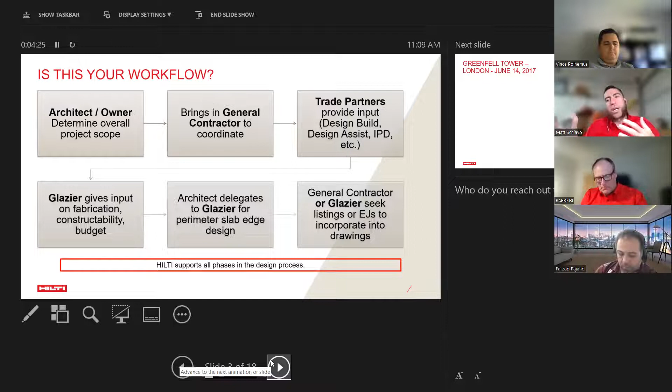Now, I work with Brian, and Brian and I talk in the Bay Area. A lot of times the architect will put that EJ on their drawings, but down here in my market in Orange County and San Diego and in Los Angeles County, I usually see the glazing shop drawings reflecting the engineering judgment. So just whoever's carrying the permit is the one that's responsible for those design elements.

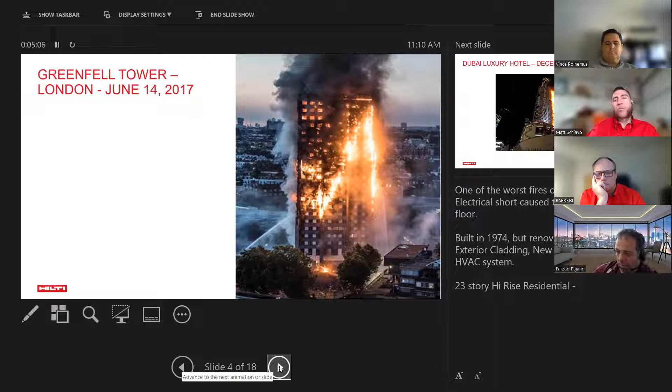And why is it important? Well, it's important because, as you've seen, you'll see these newsreels that come out, big stories on the news about fires, large scale catastrophe fires that happen. And one of them would be, say, Grenfell Tower. This is probably one of the bigger ones that happened in the past 30 years. It had polyiso insulation in the slab edge panels, and it was sort of like an NFPA 285 situation where you had flame within the panel itself, propagating like a sandwich panel situation. Definitely something that stresses the importance of selecting a proper Firestop system or a Firestop design that is code compliant.

Here's another one here for the Dubai Luxury Hotel from 2015. This is another large scale sort of leapfrog effect where you can see the flames basically leaping outside the building and taking out the glass panels one at a time. And that has a lot to do with fire science and fire dynamics. When the flame is looking for oxygen, after it's completely consumed everything in the interior, it basically reaches out into the exterior and starts to go to the next floor.

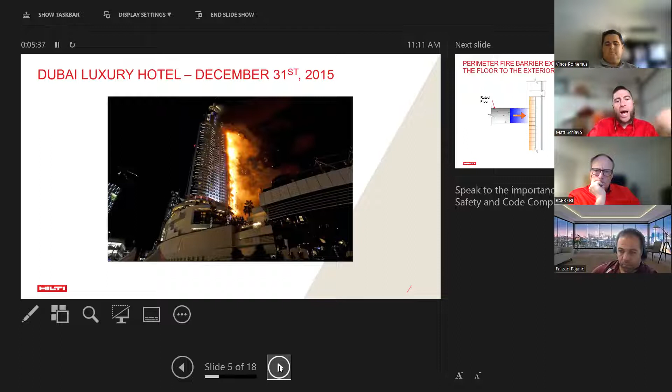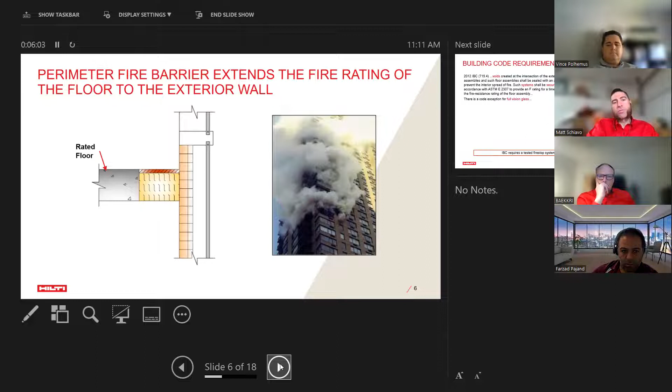The building code actually breaks this down in section 715. So not to nerd out on too much code stuff, but basically the code says that you have to fill that void with an approved system to prevent the interior passage of flame. A lot of architects tell me like, hey, what about the exterior? Well, you saw in that previous image that the flame is already exiting. It's already taking out the panels on the exterior anyway. And in that test, that ASTM 2307 test, that is the specific test standard for curtain wall systems.

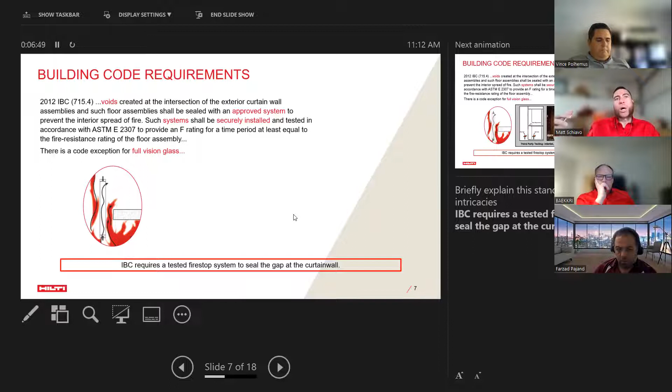But yes, the IBC requires that a Firestop system be applied at the gap of the curtain wall. And so what you get is, after you do a full-scale 2307 test, usually the manufacturer will achieve a listing. And that listing is now part of the UL directory or the Intertek directory.

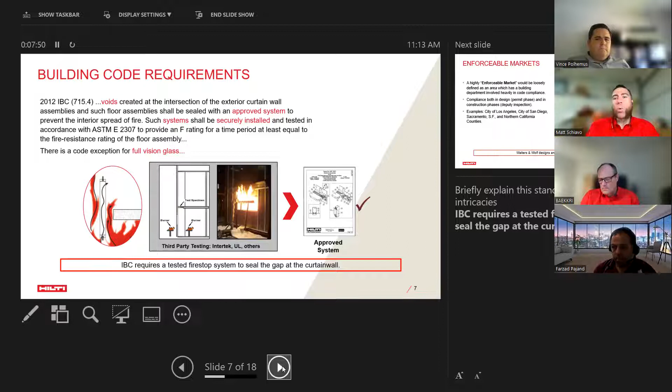It's basically a turnkey design detail that would otherwise not require an engineering judgment. And so why is this important to facade design or curtain wall design? It's because wherever you guys work, Walters and Wolf has offices in what we would consider enforceable markets. These are markets where not only do the code enforcement agencies enforce the code to the strict letter of the law, but they also have their own processes in place that actually kind of impact the workflow.

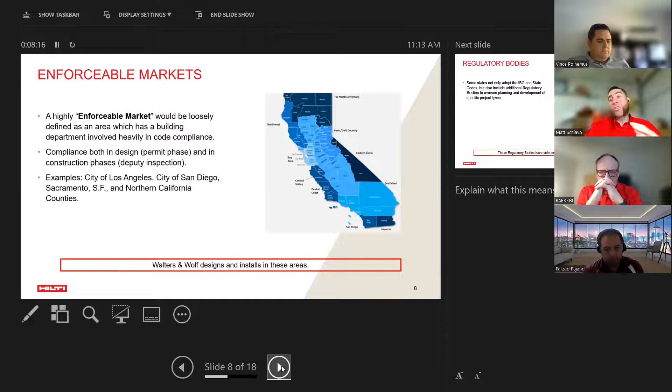So for example, you have regulatory bodies up and down California. In Brian's area and in my area, we have a lot of projects that fall within OSHPD's jurisdiction or HCAI's jurisdiction. If you're working with the California State Fire Marshal, you also might have the DGS or Division of the State Architect if it's a DSA project. And California State Fire Marshal, in some areas, they may not accept certain engineering judgments or engineering judgments at all. And so that really stresses the importance of finding a listed system or a turnkey system that doesn't otherwise require an engineering judgment.

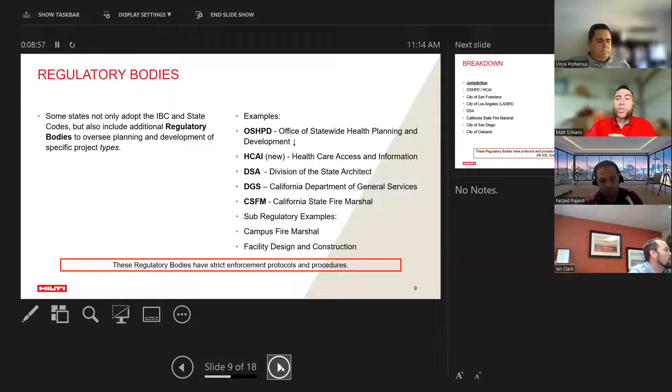So along with the code, which is that first step we talked about, then you have these enforcers that regulate the code. And then you have the regulatory bodies like plan checkers that require certain forms to actually go through plan check. So they actually want to see the code and then they want to enforce the code. But when it comes to the forms that they require, that usually is for fee, right? The plan checker or the city wants a fee for usually the glazer to file that and say, hey, this is our deferred permit, and here are the engineering judgments that go with that when you go into plan check.

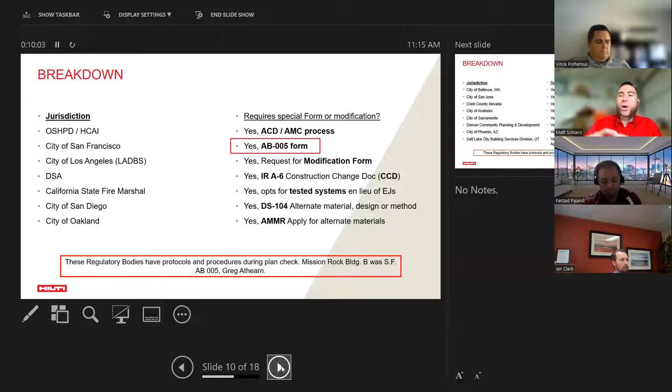So here on the left, it's just a list of city jurisdictions between, say, San Francisco, LA, California State Fire Marshal. And on the right of this slide, it shows the forms that are required. One of them I wanted to point out, going back to Mission Rock Building B, which is a precast project, is the AB-005 form. This is a form that I worked on with Greg Athearn on that project, alongside Hathaway Dinwiddie and Adamson Associates Architects. And really, we were able to manage that through plan check for Walters and Wolf. That was both for the glazing systems and for the precast systems.

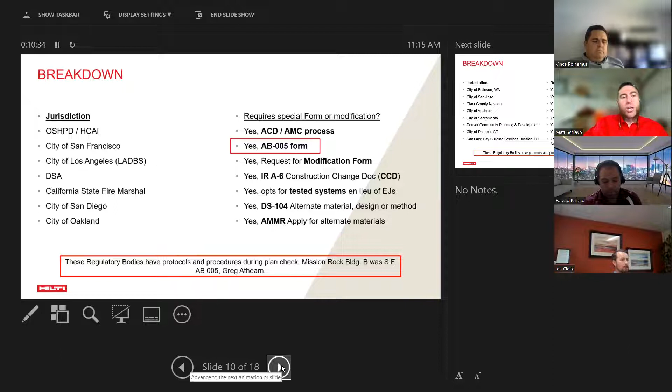So that kind of service actually helped clear the permit for fabrication and design to continue and for the approval to be satisfied with the jurisdiction. And I believe San Francisco Fire is actually approving that as we speak for that project. So this is just a good example of what to look for in other markets, like Washington, Nevada, Clark County, Arizona, Utah. These markets also require a form process when it comes to validating the shop drawings or validating the engineering judgments if there's a modification, because every time you have a listing, it's ready to go. And anytime you have a modification comes this process.

So you can see here on the right side, again, coalescing with the bullet points on the left, some that stand out. For example, Nevada, Clark County, they require a 1003 form, alternate means and materials form. Or in Bellevue, Washington, they require an AMM form. If you're working in Denver, they go with an AMMR form. And so this is really where we can come in to help you and to help assist Walters and Wolf in any market that you're working in. It gives us that agility to help you with the different offices that have different expertise. And we want to offer our expertise to help you through plan check with those individual offices that are shooting for plan check deadlines.

So this is kind of a summary of the services that we offer Walters and Wolf. And these services are offered to help you get through that plan check process. It could be only one service, or it could be a grouping of services. It really doesn't matter. Brian, Christian, and myself are dedicated to this service offering in whatever capacity on whichever project. So to start, we can help you with finding systems. Brian and I have put together submittals like this. This is just a consolidated one, but think of helping the Walters and Wolf engineers or designers quickly select systems so you can easily incorporate them into the drawings.

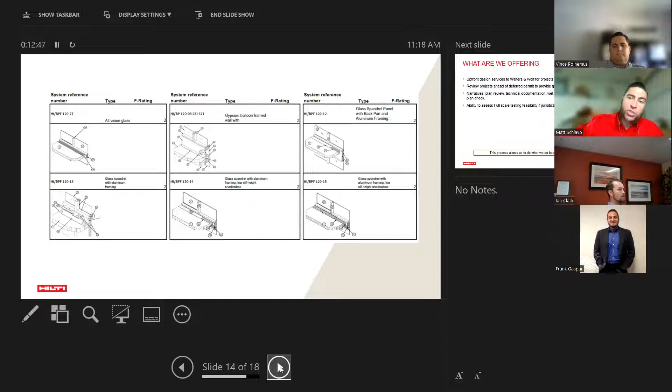You can see here, this is just kind of a schedule detail approach where you could keep this on your desktop, you could keep this on the Walters and Wolf server, and whenever you're dealing with perimeter fire containment, you could easily locate a system that matches the MAC clip or that matches your design, and click on that and just drop it right into the drawings. This would be more of the tested system approach.

We also provide technical submittals, like just the overall submittal. Maybe you have a project that's LEED. Maybe it needs some CDPH or green building type requirements that the architect needs to satisfy because the joint has Firestop materials in it. We can provide technical submittals.

Of course, we do engineering judgments. Brian and I do those on a daily basis. You would call us, send us your CAD drawing, and we would basically churn out a detail for you in CAD and send it back to you ready to go.

And then, of course, if you need additional service on top of those standard offerings, we offer wet stamp. So maybe you have a job where the jurisdiction wants to validate that the design is sound and they want a third-party approval. We can do that with a wet stamp. We use multiple engineering groups here in California and in other markets to provide wet stamps, in addition to our sign and seal on the EJ itself.

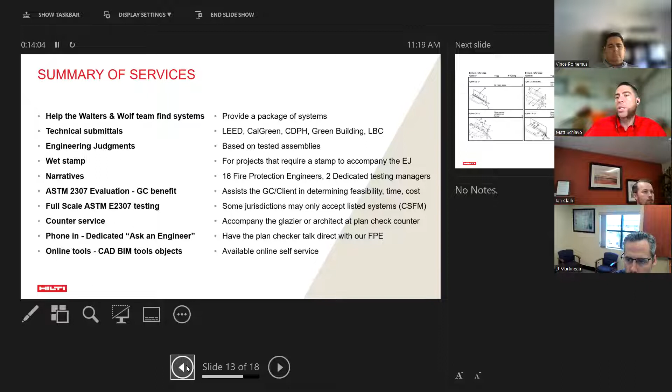You may have a project where the plan checker says, I want to be able to look at each individual component of the system, and I want it to read like a narrative. This is the way OSHPD is doing it, HCAI, so for California hospitals, this applies. And those narratives are just a breakdown, kind of like reading a recipe. Each individual ingredient is laid out from step 1 to step 10, and you could read it exactly like a listing would read. It references right back to the tested systems, and that makes the plan check process quite easy because they can look at those tested systems as reference.

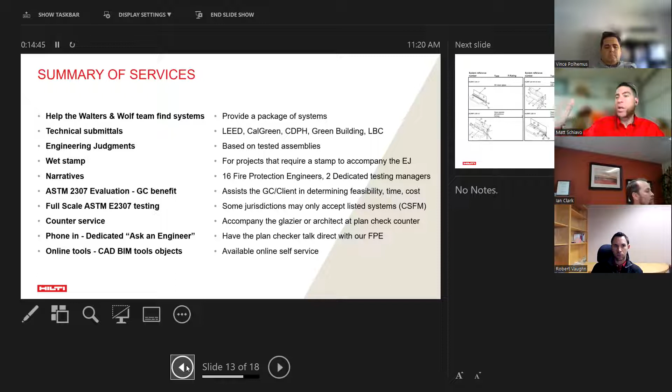And then the last three are really dedicated to plan check services. I worked on this process with Steve Cisneros in the office down here in LA. He had a project, 1601 Vine. It was a couple of years ago we did this project, and the plan checker was questioning items related to fire, and I went to the counter with him. I sat with the project manager and we cleared the plan check milestone for him.

So we offer that white glove service to go to these markets where you're going to have San Francisco Fire chiming in, or LA City Fire, or Anaheim Fire, and I am the person that goes and does that, alongside the form that's being filed for plan check. So a really cool thing is if you have a plan checker questioning, you can just call the fire protection engineering team from Hilti direct, and they'll help get you out of hock with the plan checkers. They'll basically state, hey, this is my EJ, these are the justifications behind it, and this is how it validates the performance for perimeter fire containment.

So all of these are offered to you today. Most of these services are not charged. We do this as a service to help guide and provide expertise and consultation. The only ones that are for fee are the full-scale testing, where you'd have to fully burn test, and sometimes wet stamping, depending on complexity. Most of the time we offer those as a service to you guys at no charge.

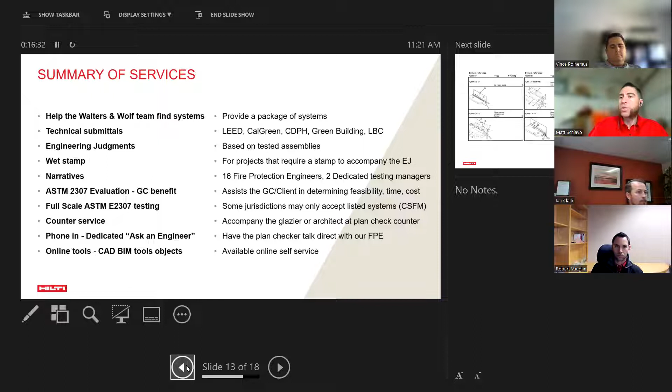So what are we offering? We're basically offering those services you saw to help guide you through the process, to let us do what we do best so you guys can manage the facade business. And there's a clear advantage to Walters and Wolf here, because if you're able to obtain your approval ahead of time and you don't have to worry about items related to fire containment, you're able to start fabricating much quicker. That's the implication, right? If your deferred permit is held up by an item related to Firestop, we'll help remove that barrier to get your design turnkey and pass through plan check with the white glove service.

And we're doing this with success. Like I said, the Mission Rock Building B project with precast and with glazing, this would be considered, I think, a successful workflow where this actually worked out in harmony. So it gives you the peace of mind. It gives the GC the peace of mind as well that we're doing right by the client, right?

We're getting that approval out of the way early, so we don't have to worry about the plan checker taking an exception or making comments. And meanwhile, you guys are waiting to fabricate because there's an item that's been commented on in plan check. So we're here to remove that barrier. We're here to remove that hurdle. And we're basically here to streamline the process for you, right?

I was thinking this could sort of be a workflow that we could work together on, that maybe we start with identifying which ones are the complex projects coming out of bid, that maybe you would send those projects to us and we could look and properly scope the job and say, this one's going to end up in Clark County. We foresee that these are the different stages that it's going to progress through plan check. This is the solution that would work here. And then we'll file the form for you. We'll file all the necessary documentation to get it through with the approvals.

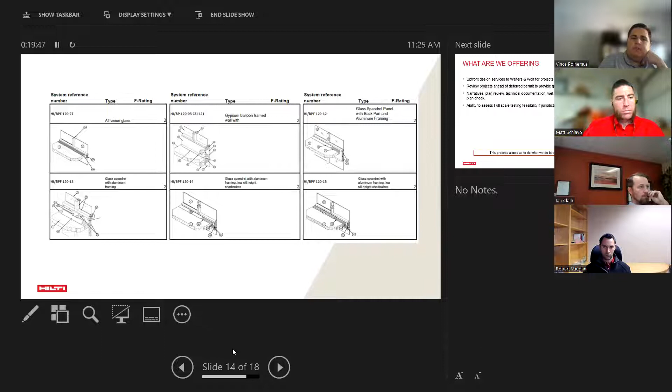Matt, do you think you could go over just a pretty typical detail for curtain wall? Just all the components that go into that. Sure. Yeah, like a typical spandrel system? Let's just go a typical curtain wall that's running past the floors and has spandrel at the floor lines. Sure. Let me pull one up here. I might even have one on deck that's just a quick breakdown.

Here we go. All right, let me share off of this one. This one's a little different here. And I'll share off of the screen here. Here we go. So can you see this one here? Yes. Okay.

This one is JS 120-05. If you look at components in the system, this is just a breakdown of a common system, but you would have a clip system to impale the curtain wall insulation within the unit. Clip systems are pretty popular because you're able to just clip off to the framing members that are already there. You would space those clips intermittently. And then you have item 2 here, which is the insulation board. This is like your rock wool, your curtain rock 80, that is basically just impaled right into the unit. So whether you field install it or shop apply it, it just really depends, right?

Insulation drops into the unit within the spandrel, behind the unit at the plane of the floor line, item 1. Depending on joint width and depending on system, like where these mullions fall in relation to their span, you can see that fire test we talked about here really punishes the spandrel. So sometimes you need a stiffener angle right at the plane of the floor line. It just depends, again, on the system. Some systems are rigid enough to withstand 2-hour fire exposure, so they don't need an angle there.

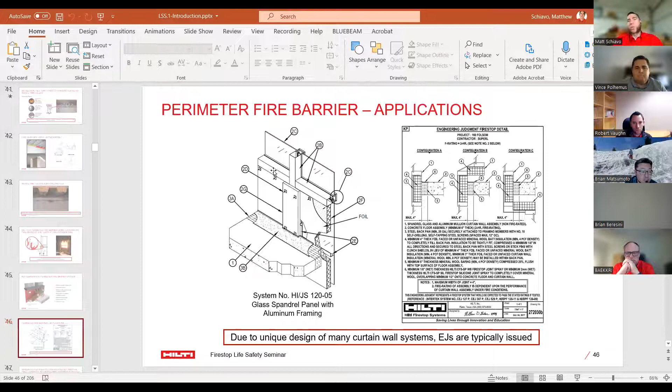So does that kind of make sense? No, that's great. I think that's good to go over for everyone to see.

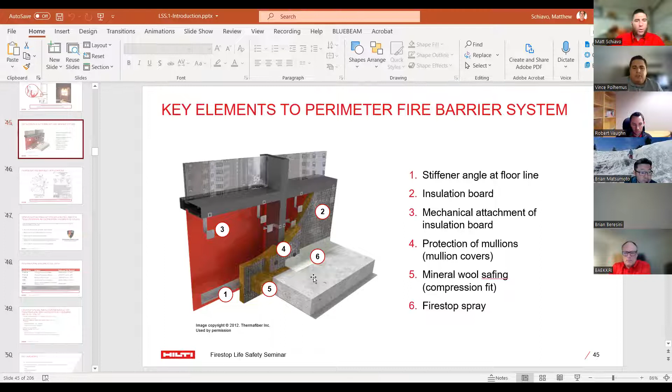So the number 4 there, the protection of the mullions, the mullion covers, like you just said, that's really dependent upon the whole system here. And we've been seeing that. It seemed like those have become more commonplace, at least in what the architect has drawn as far as they've taken design, that they're calling for those mullion covers. Is there a condition that really drives having that more or not? Or is it really just up to whoever designed that system where they wanted to put it?

Well, you'll see that with code development, I'm going to show you some different systems that actually don't have them, they're a little sleeker, right? So, as code continues to be developed, you can see certain systems are offering, say, full vision glass. Like this one is a lot less components, right? We went from like 25 components on that previous system to now this one might have just 8.

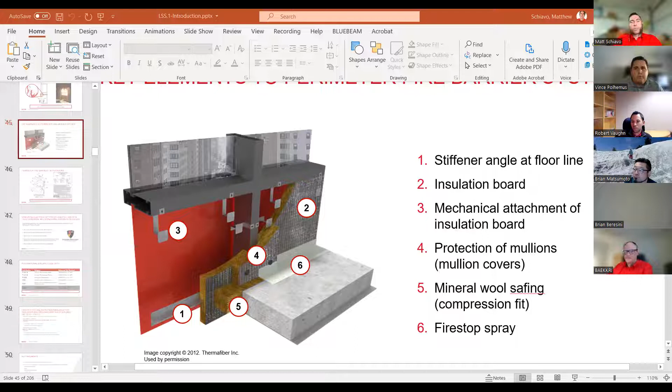I don't know if you switched, I'm seeing the same detail as the last one. Oh, really? Okay, let me see if I can switch over here. There should be this detail 120-27.

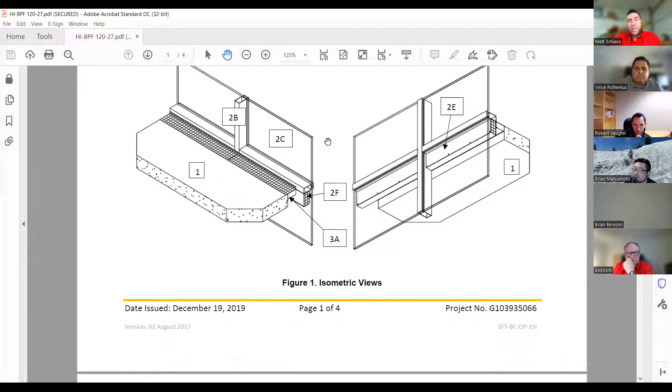As code develops, you can see that, like you said, the architect might draw something that's just full vision glass or doesn't have any mullion covers, right? So you can see on specific systems like these, item 3B is essentially taking the place of a mullion cover at the vertical. So some systems over time, as code develops, they just get better. Systems get better.

So maybe it's a system that's very robust, say it's a huge panel. That system might have the bracket directly exposed, but again, it doesn't deal with bracket protection per se. It has to do with just the mullion protection, that you won't have a breach in that fire test with flames coming right through the gap at that vertical mullion connection. So whatever is the best case of passing is really how it shows up in the listing.

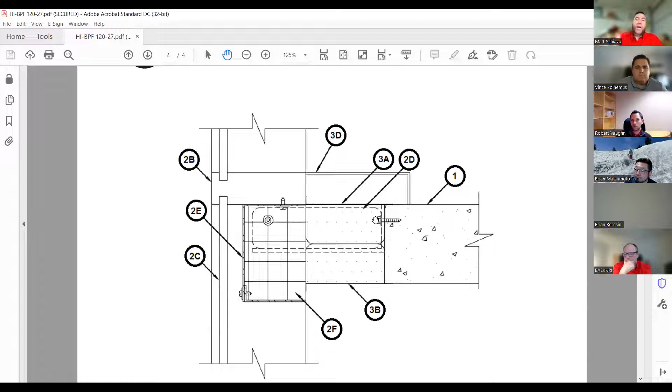But here, for example, you could have full vision, basically have your system with just a 4x6 curtain wall insulation box. And then you would have this quick seal material, which is actually not spray applied. It's a prefab material that just drops into the gap, with an adhesive on either end, and would basically join the top of slab to face of system. And then 3B, you would run along a section of that vertical mullion, which is shown right here.

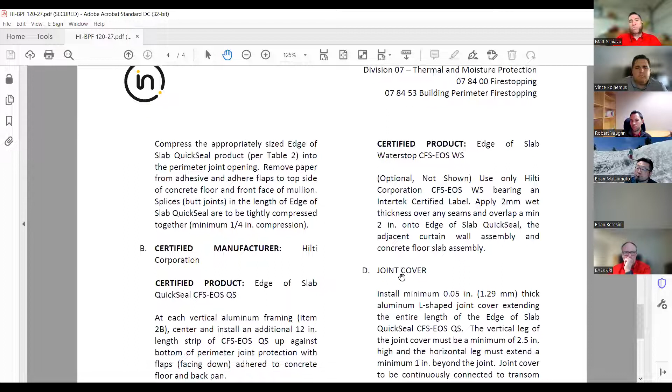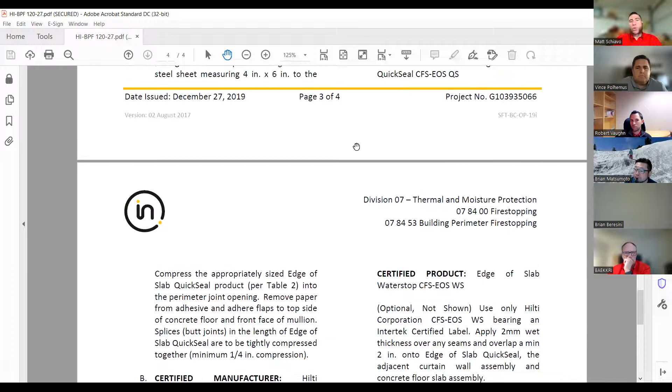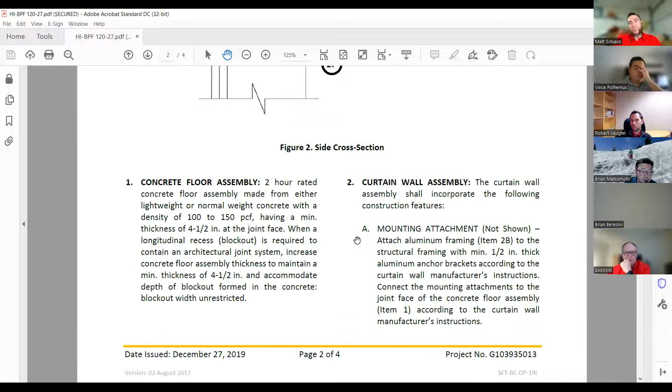They call it actually a cover, or 2B is a vertical mullion framing an additional 12-inch strip facing down on the underside. So that would be that little run of quick seal, if you will, that is underneath the vertical mullion there, or running alongside underneath. So systems like this, again, are optimized. Maybe an architect has an idea and then you send your system to us for an evaluation, a review, and then maybe a system like this just works as is and it doesn't require an EJ. And so this one is actually a benefit, because if it's in a certain market that might question an engineering judgment, there's no question that this system would be ideal.

And where we see the industry going, Vince, is that the more you guys standardize, the more we start to standardize. The more systems become typical, then we end up testing more of those typicals in hopes that we make a system that exactly matches what you guys are installing. And it ends up not really requiring an EJ, right? It's just a turnkey basis of design.

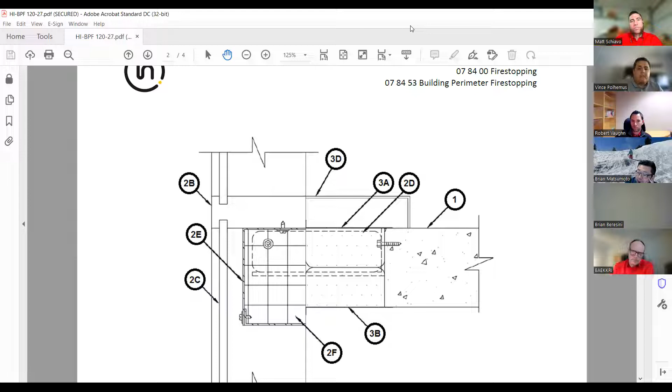I think the challenge that we've run into a lot in the past comes down to our anchorage, and the fact that that really is an area where the curtain wall industry isn't standardized, especially at the higher levels, where a lot of the established turnkey systems are built around more of a knife plate coming off that the mullion's attaching to, which is very typical, like with a stick wall.

But when you look at Walters and Wolff, we have our mat clip, which you referenced earlier, which is very different than what Benson has or Enclose has. And we run into that where the authority having jurisdiction says this anchor is not exactly what's there. And so we're having to get those engineering judgments for the fact that how we're anchoring the curtain wall isn't exactly what was in the test.

Yeah, this happens a lot, not only with the anchor type, but also with top of slab or face of slab. Right. Some systems are tested. We do have systems tested with both configurations, including the embed. So that was helpful for a project that we had, I think it was in Chico. California State Fire Marshal wanted to see the exact face mounted anchor with the exact type of clip, and we can share those with you.

And I think when we share our systems with you, we'll note those maybe in a storyboard, or just even some notes right on the system of what it is. What am I looking at? Is it a low sill height face mount? Is it a top of slab anchor? Does it jive with what we're looking for?